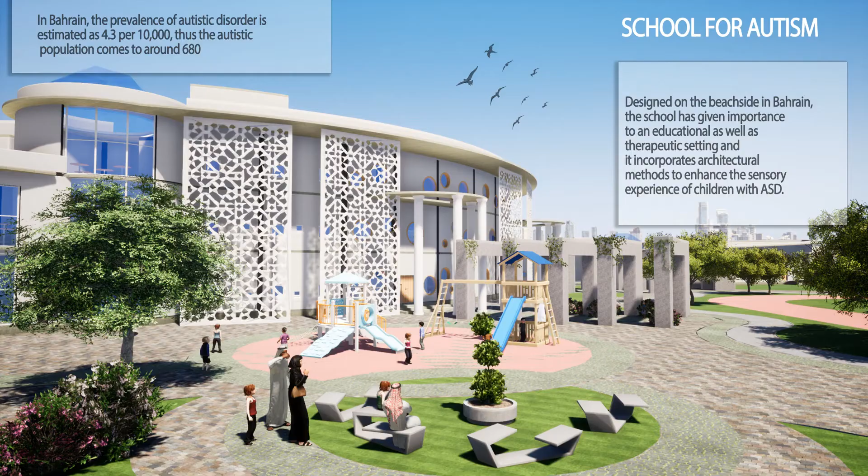I have designed a school for autism in order to understand how design changes along with various user needs. The school has given importance to both educational as well as therapeutic programs.

The current autistic population in Bahrain comes to around 680. The site I've chosen is in Karbabad, along the northern coastline of the country. The main reason I chose the site is because of its beach view, known to have a calming effect on autistic children.

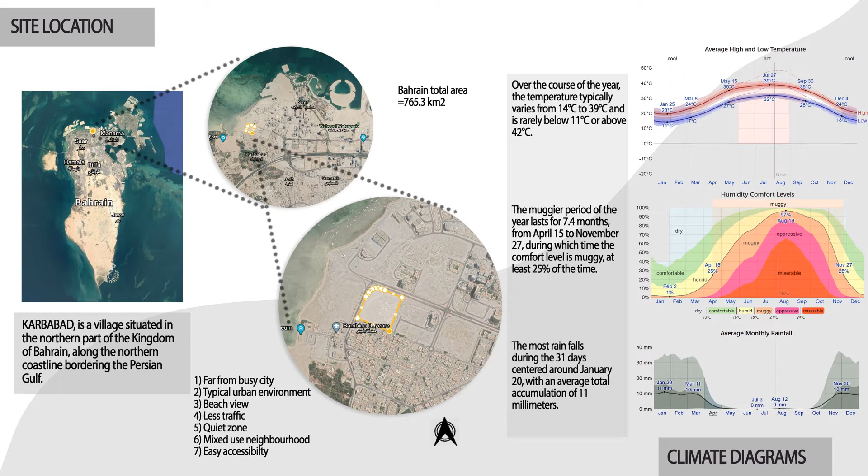It is also in a quiet zone, which poses to be less distracting for them. The climate of Bahrain is hot and arid, like the rest of the countries in the Middle East. The predominant wind direction is from the north as well as from the northwestern beach.

Some of the important landmarks are the Karbabad beach, 250 meters away from the site, the Bahrain Fort, which is the country's first UNESCO World Heritage Site, Seef Mall, and some adjacent residential buildings.

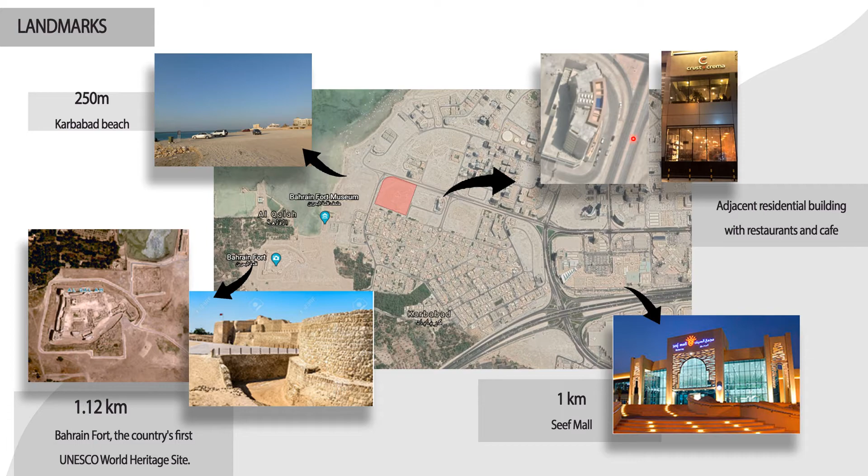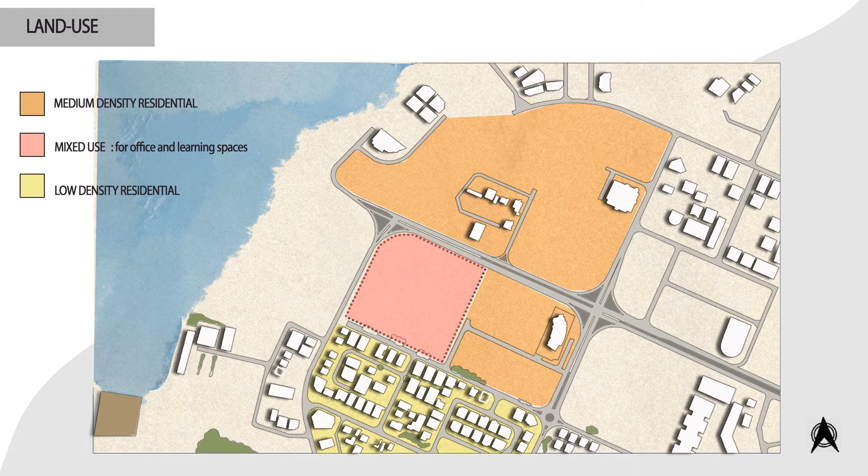The main road acts as the primary axis, which diverges to a secondary access road to the site. The site has been proposed as mixed-use land for offices and learning spaces. Surrounding areas are used for medium to low density residential zones. The total area of the site comes to around 25,500 square meters.

The existing vegetation includes palm trees and Ghaf trees on the borders, and dwarf shrubs in the central region. The connecting road is 7 meters wide.

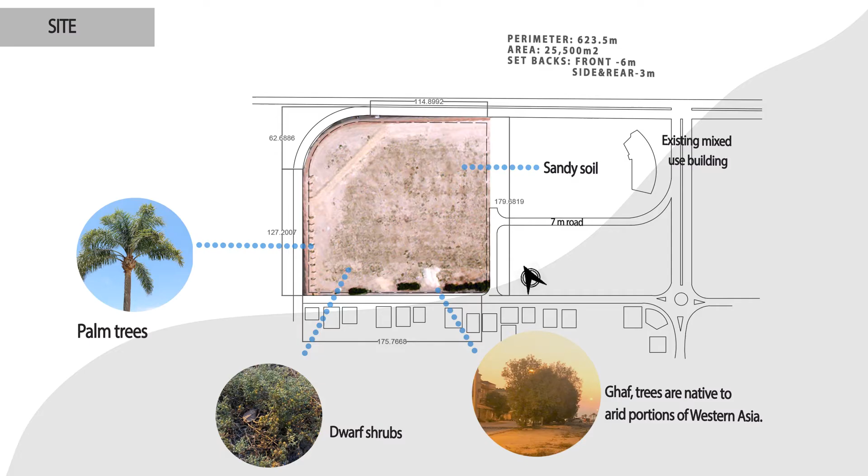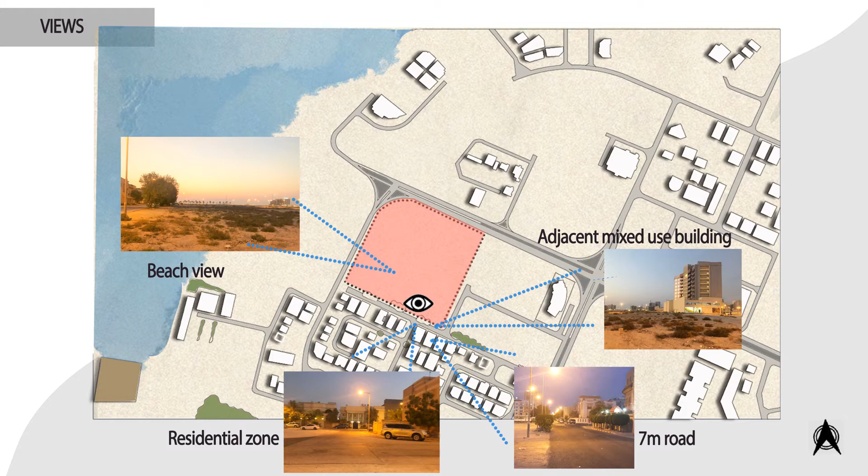These are some of the views taken from the site. The view from this point shows the beach view, and the view from the rest of the 3 points shows the existing low-rise buildings as well as the roads.

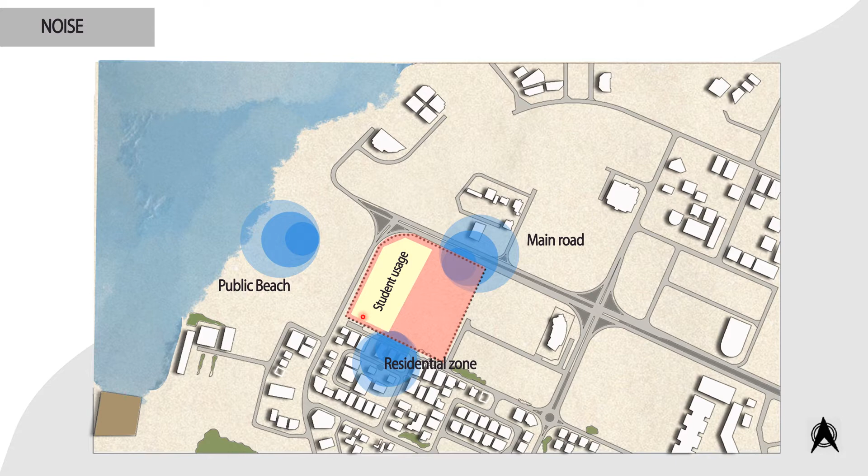Since it's a school for autistic children, noise levels had to be considered. Even though it's quite less, the major sources of noise were from these directions: the public beach, the residential zone, and the main road. This is why the student usage has been zoned along this side.

Coming to my case studies, the first was the Abu Dhabi Autism Center in Abu Dhabi, UAE. They use simple, calm, limited-in-detail internal spaces to maintain a stable and safe environment for the children inside. They also use gentle flowing spaces and curved circulation to make it easy for children to find their way. The palette of colors used was neutral, to avoid oversensory reactions.

The second case study was the Eden Institute in New Jersey, USA. It used a simple U-shaped circulation layout along with gradual transition spaces, from higher to lower sensory spaces and further to individualized rooms, in order to avoid a sudden change in stimulus level within the children.

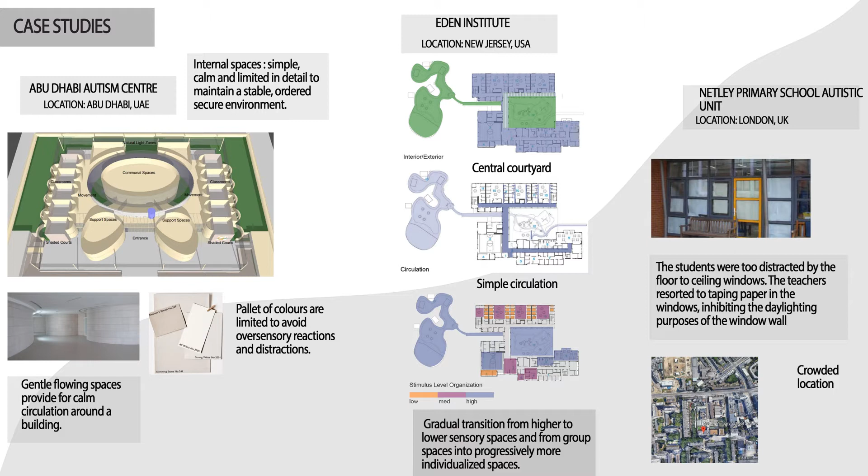In the Netley Primary School Autistic Unit in London, the architects used high floor-to-ceiling windows, which proved to be distracting for the children, so tall windows need to be avoided. It was also located in a very crowded location.

In the Northern School for Autism, the student learning spaces were arranged around a central courtyard, which also provided a biking path, known to be good for autistic children. It also provides a specialist wing, especially for therapeutic purposes.

In the Kuwait Autism Center, skylights were provided in the corridors to help with daylighting purposes, and the classroom sizes were 5 by 5 meters.

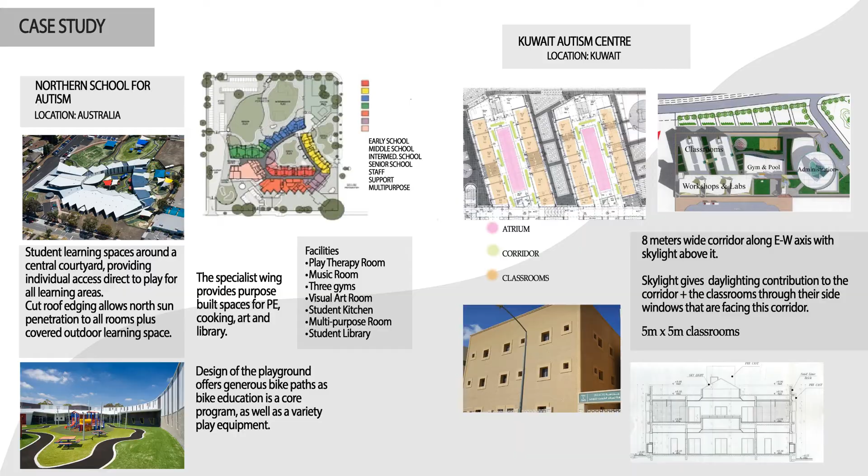Based on all the inferences, this is the site zoning I reached. The academic block is placed here for the beach view. The Teachers Institute, where teachers can get specialized in special education, is placed attached to the academic block to have live sessions with students. Therapy is the main part of the academic program and hence is placed close to the academic block. Admin and hall are placed close to the entrance plaza for easier access for parents and guests.

The sports zone is at the center. Parking and services are on the boundary of the site near the neighboring residential zone. Vehicular pathway is restricted to the periphery of the site to allow safer movement of children inside. The pedestrian pathways connect all the buildings to each other and to the spaces inside.

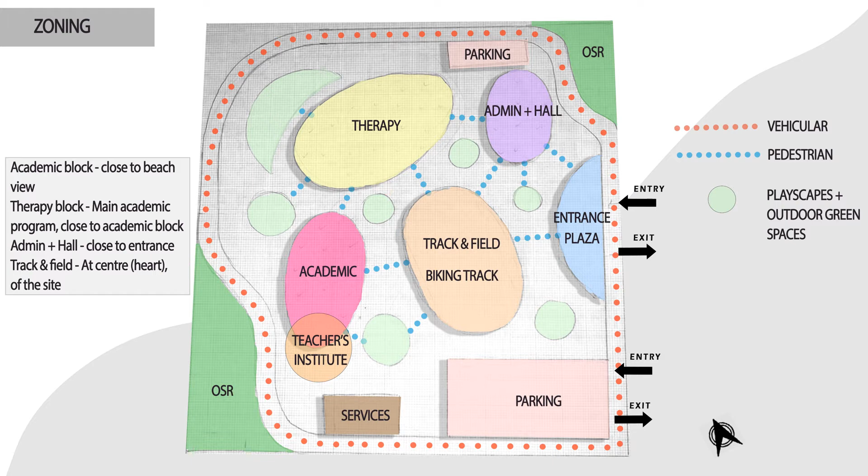The form of the buildings developed from the concept of the five senses. The academic block takes the shape of an eye, and the iris becomes the sensory dome. The Teachers Institute has a rhythmic element, corresponding to the hearing sense. The therapy block takes the shape of two blocks balanced by the sense of touch, showing the visual impact of weight.

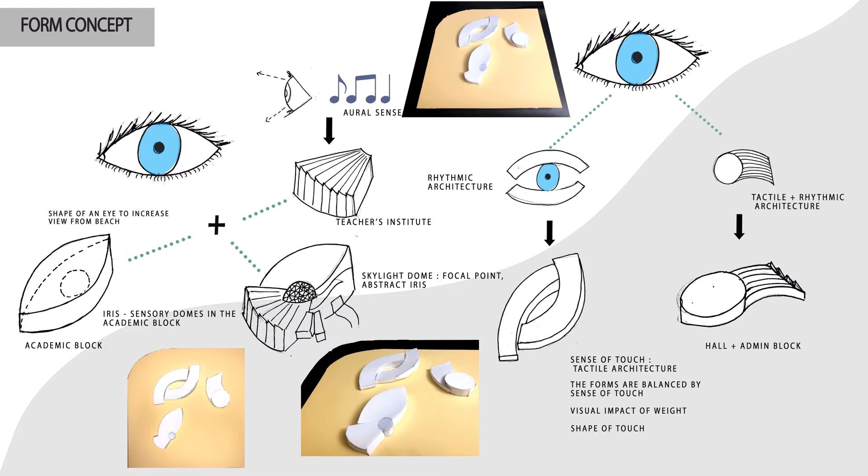The admin block will also have a rhythmic element, corresponding to the hearing sense. By performing the adjacency space matrix, it helped me arrive at the bubble diagram of spaces inside the blocks.

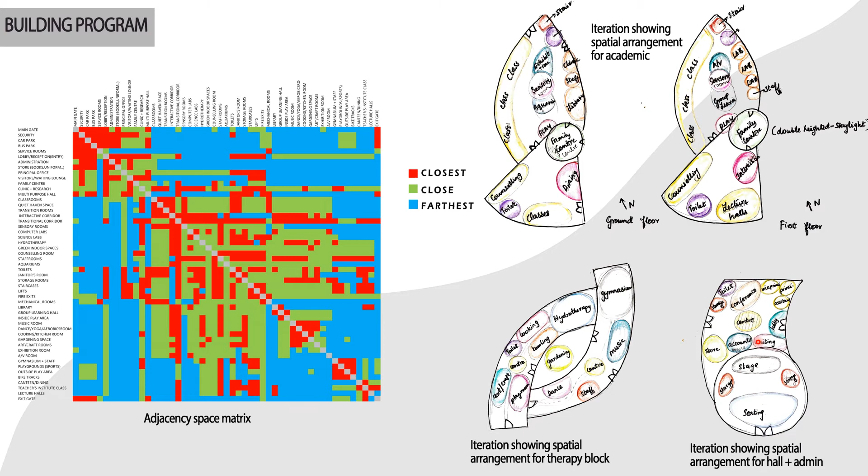For the academic block, the classrooms are placed on this side for beach view, the sensory and group activities at the center, and work-oriented spaces on this side. For the therapy block, the corridor spaces are at the center and the activity spaces on either side. For the admin block, the skylight opening is at the center with the functional spaces around it.

Coming to my site concept, the building program is divided into 3 building volumes, which are then pushed and rotated along with the site shape and wind direction in order to overlook the heart of the site, with activities flowing in and out via nerve-like pathways. This type of arrangement allows a shared environment both inside as well as outside.

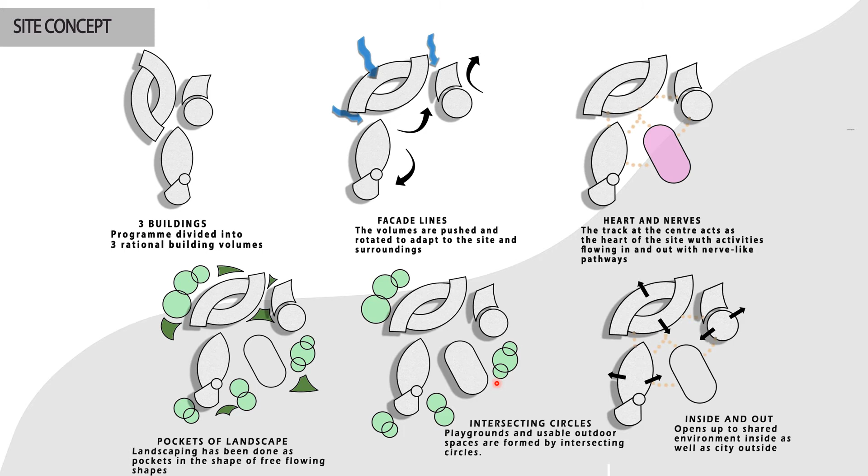The playgrounds and usable outdoor spaces are formed by intersecting circles as well as free-flowing shapes. This is how the master plan looks like in the context of the site.

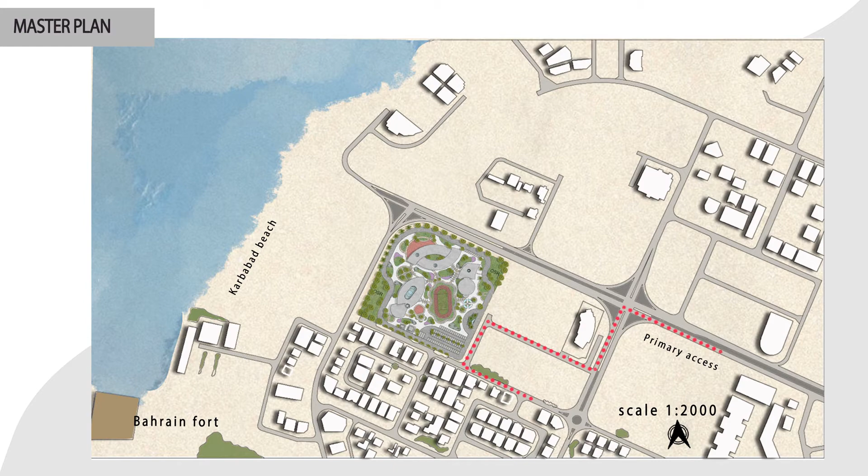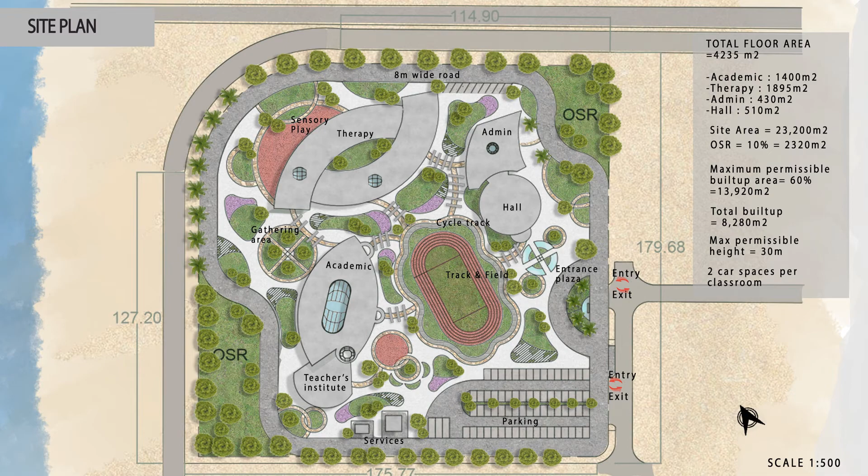The total floor area comes to around 4,235 meters square, and the total built-up area comes to around 8,280 meters square. This is how the site looks in section view from this direction and this direction.

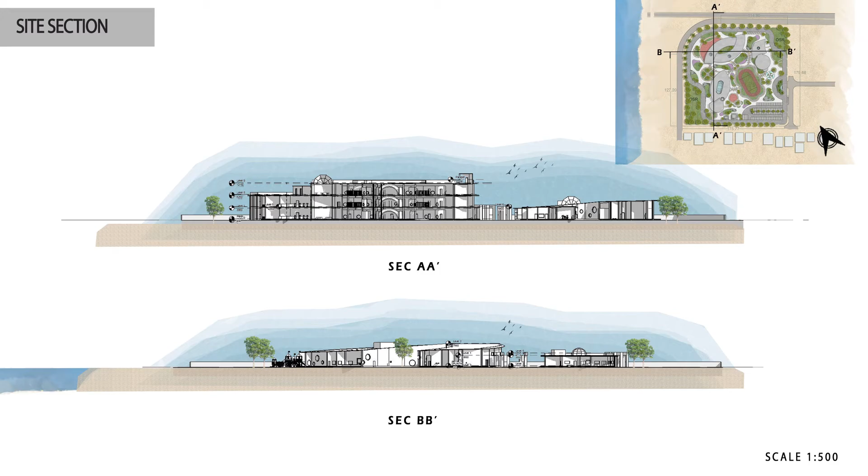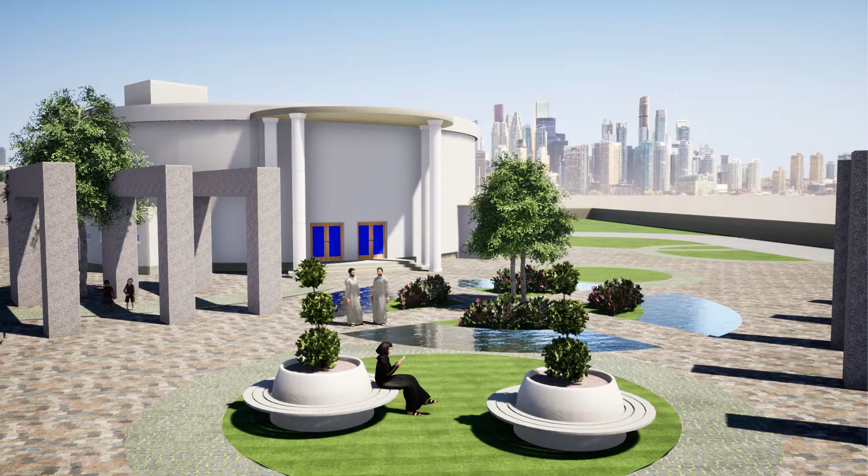These are some of the views taken from the site. I used the concept of the char bagh to form an interesting entryway to the hall.

Coming to my academic block. This is the main entrance which leads to the classrooms on this side facing the beach. The teacher to student ratio is 1:5 with 25 meters square area.

There is a gradual transition from higher sensory, that is a corridor, to the vestibule, to the medium sensory classrooms, and to the lower sensory individual balcony areas where the student along with an assistant can go to if he or she feels overwhelmed. The interactive and the sensory spaces are at the center along with a triple-heighted courtyard space.

The family center is a double-heighted space for interaction with parents. On this side, the staff, the clinic, the library, and the toilets are placed. The Teachers Institute has an open access to the academic block in order to allow more interaction with the students.

The staircases are provided at a distance of 36 meters away from each other, along with a lift for 13 passengers. There's also an electrical room on the ground floor.

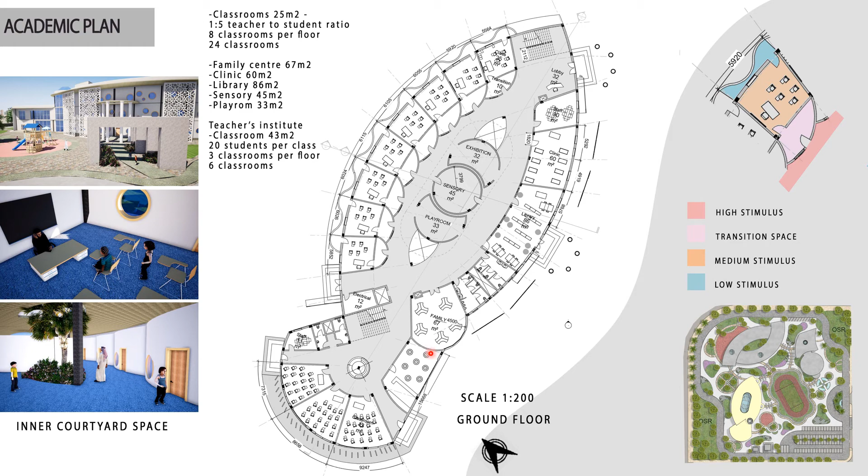This is a small cafeteria that is provided in the Teachers Institute. These are the classrooms, the staff room, and the staff toilet.

The first and the second floor follow the same layout with the inclusion of an aquarium space, which is known to reduce anxiety in children, an AV room, a science lab, and a computer lab, as well as a cafe.

This is how the roof plan looks like. The skylight is provided in order to bring in light to the central areas of activity as well as to the courtyard space. Islamic glass domes are used as a design element in all 3 buildings. It gives an open space feeling as well as brings in more light.

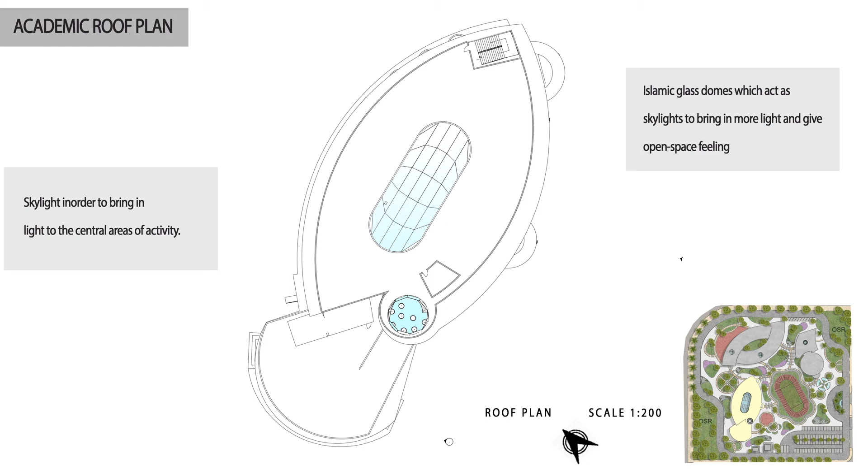For the elevation, I have used Islamic Mashrabiyah facade design, which acts as a second screen. I have also used circular windows, which allow sufficient amount of light, but at the same time it is not distracting for the kids. For the Teachers Institute, I have used vertical fin facade, which provides shade from the eastern sunlight, as well as shows rhythmic architecture.

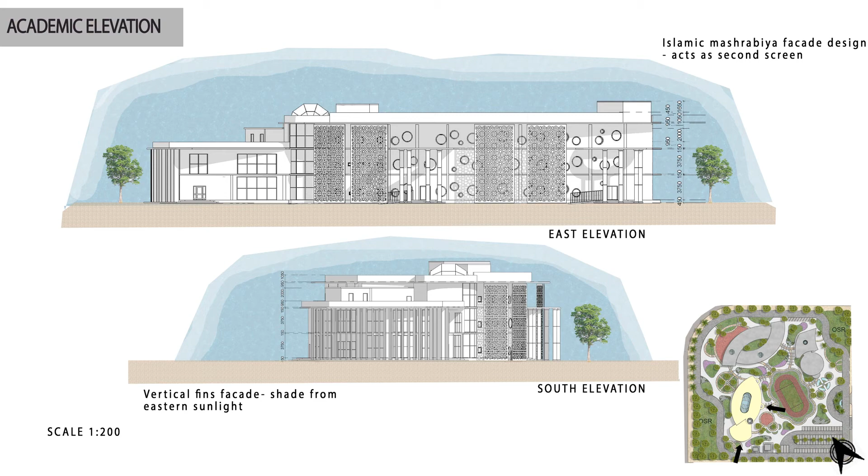These are some of the views of the elevations. The western elevation shows the individualized balcony spaces. The section shows the prominent sensory domes at the center of the building.

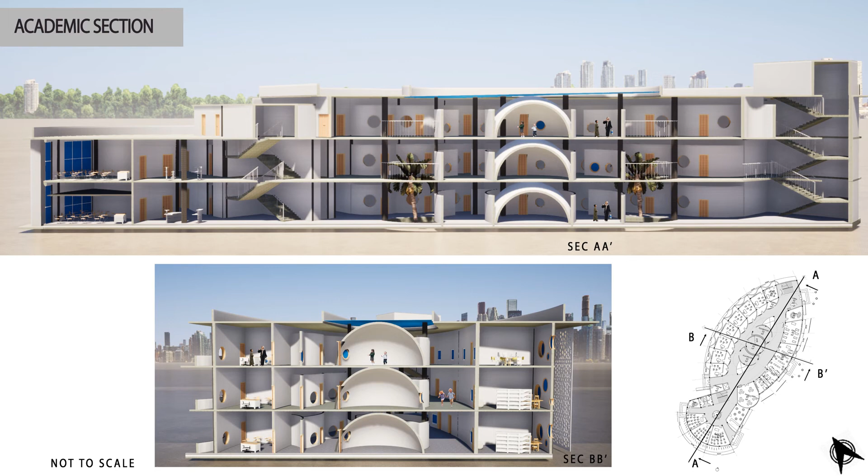The common insulation used in Bahrain is extruded polystyrene insulation. I wanted to integrate nature with the built spaces and hence provided planting in the voids.

Now coming to the therapy block. The therapy block follows a simple curved layout with corridors along the center, activity spaces on either sides, a hydrotherapy and gymnasium space on either ends.

Central areas act as interactive spaces with Islamic dome skylight shedding light on indoor planting and play areas. Both the blocks open into a central open courtyard.

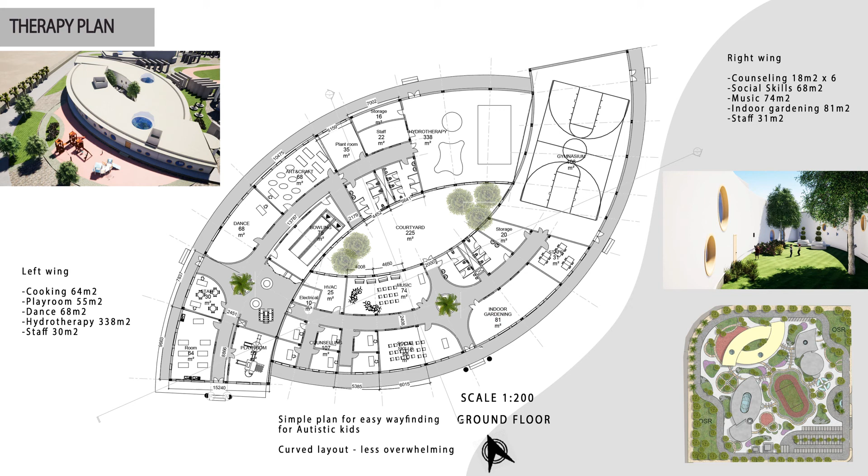The block includes many activities such as cooking, dance, arts and craft, bowling, music, social skills, indoor gardening, gymnasium as well as hydrotherapy. This is how the ground floor plan of the therapy block looks like.

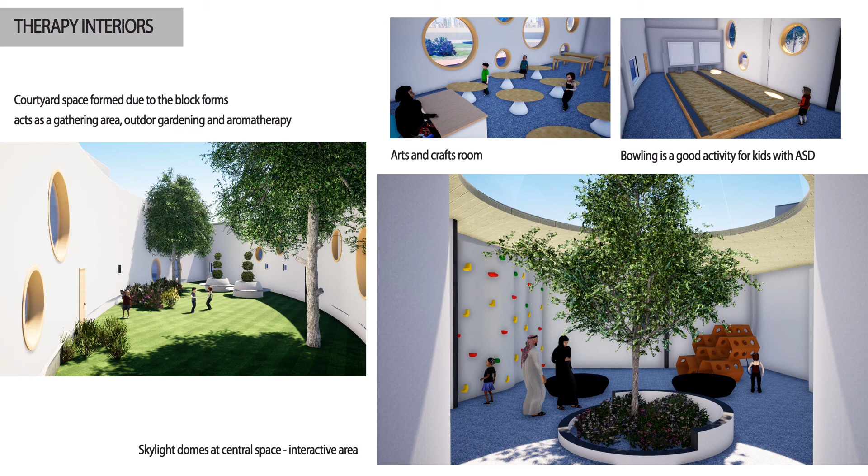These are some of the views of the central courtyard space, the central interactive space, arts and crafts room, bowling room. The two building masses have a slope from 7.5 meters to 3.5 meters.

It also has circular windows and Islamic domes. These are the views from the south and the west directions.